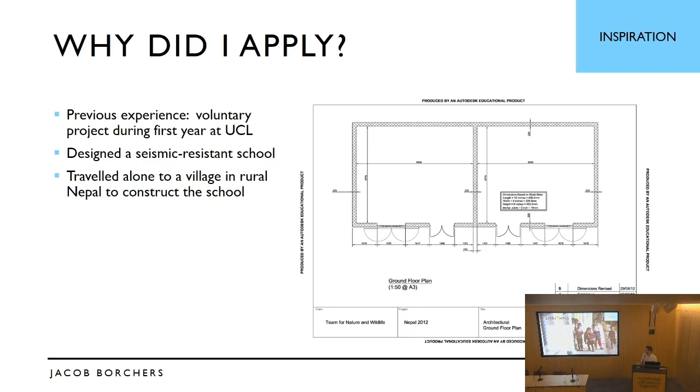So when I set off that summer, I was quite confident because we had all the money, we'd done all the structural calculations, we'd produced the drawings, and I had 1 year of engineering knowledge behind me. So what could go wrong? I thought, everything. So it turns out everything went wrong.

The project was an abject disaster from start to finish while I was there, and also while my colleague was there. We had landslides that stopped us getting any materials to site. The building materials we'd designed the school with couldn't actually get sourced anywhere in the district when we got there.

The only translators we had were some university students, and they got bored after about 3 days of the 4 weeks that I was there, so went back to Kathmandu, so the rest of the time no one spoke any English.

The labourers we employed couldn't read our construction drawings. They'd never seen drawings in their life before, and they also couldn't lay concrete blocks, and as we were trying to get them to build a concrete block school using our drawings, it was not a smooth process.

The labourers went on strike several times. There were huge divisions in the community that sometimes resulted in physical fights happening on site, and these physical fights would be a result of conflicting local politics and huge divisions due to the caste system in the community.

We also had big problems with corruption. A lot of the senior people there expected a big part of the project budget to allow us to work there.

But despite all these community divisions and everything they disagreed on in the physical fights, the one thing they did all agree on was that Nepal does not have earthquakes, and they strongly resisted all the earthquake-resistant features of our design. They saw it as an unnecessary expense and complexity, and kept saying to me, if you give us the money, we can build 4 of our own schools in half the time. And they proved that point to me.

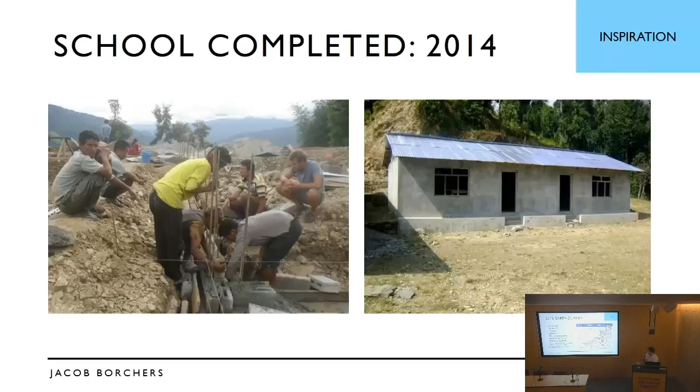But then in 2015, you probably remember it was in the news, Nepal was hit by 2 massive earthquakes. The epicentre of the second one, which was 7.3 on the Richter scale, was about 10 miles from Sunkhani, the village we were working in where we'd built the school. The whole village was completely destroyed. I went back in January this year for the award, and not a single building was left standing. It's apocalyptic - everything is just a pile of rubble.

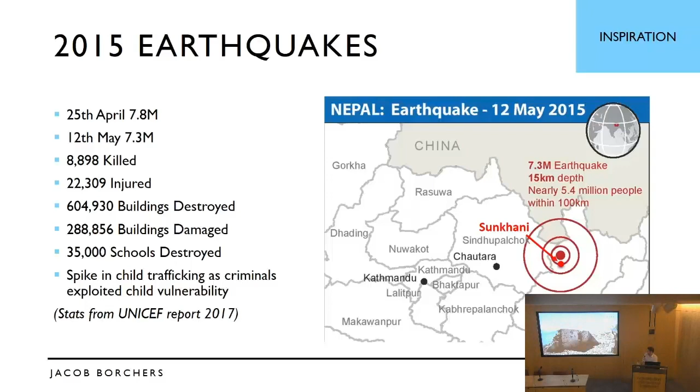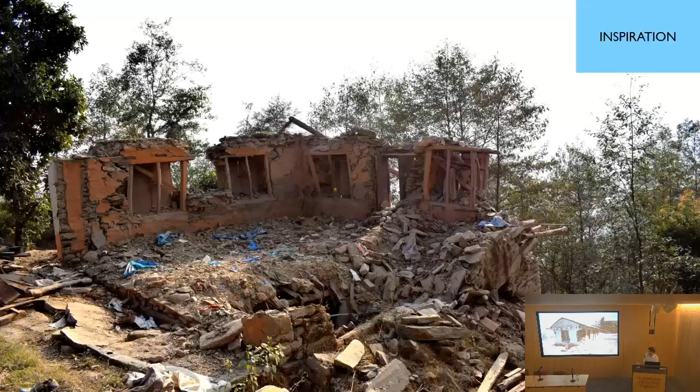And this is how most of the community is now living - these tin shacks they made from the metal roofs of their previous homes. The idea was that this would just be a temporary solution until aid money came in and they could rebuild. Really hot in summer, really cold in winter.

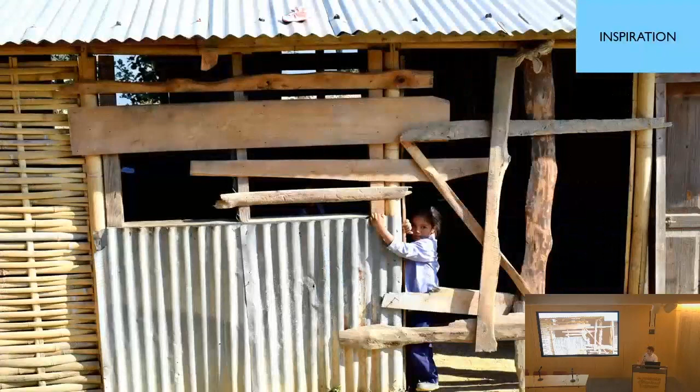And this is what they call temporary learning centres - temporary schools built from the remains of the old schools, mainly the tin roofing. The idea was this would just be a temporary solution that saw them through until more money came in and they could rebuild the schools. But 2 years on, it's not too temporary anymore.

So despite vowing never to return to Nepal, the fact that our school survived and no other schools did made me reflect on the importance of earthquake-resistant engineering, and despite the difficulties in implementing it, it is worth it. I also strongly suspected that engineers and NGOs out there do a much better job of implementing it than we did.

So I applied to the Pai Lin Li Travel Award to go back this January and talk to practicing engineers and NGOs out there, to find out what they do to overcome the problems that we faced. So what are the problems in implementing earthquake-resistant engineering?

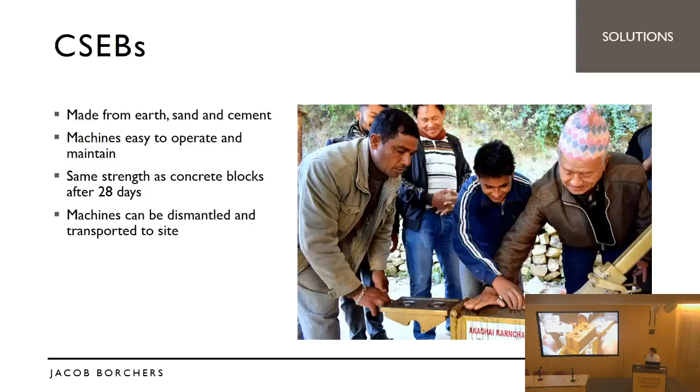After 28 days of curing you get these CSEBs - no, sorry, this comes out of the machine straight away, and you leave that for 28 days and then it has the same strength as concrete, or so they claim. I'm sure it's got the same strength as the Nepalese concrete, because that's not good. But they come in all shapes and sizes - sometimes they interlock like these ones for added strength, and this one's got holes in so you can run rebar through it. The main point is you're minimising the amount of material you have to transport to site, because you're using most of the material from the site itself.

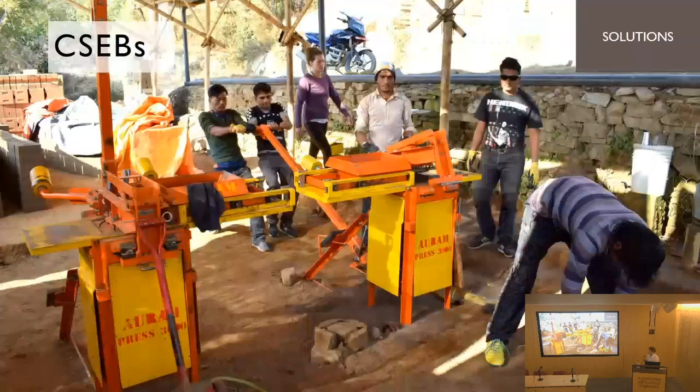They're also good because they're unskilled to produce. So this NGO, whenever they go to a site to build a school, employs the locals in producing the blocks for the school, which provides employment for the time that they're there.

In more rural areas where you can't get cement or steel because they're too far away from any road, some NGOs are developing wooden ladders, which you use in the same way as RC ring bands. So you put them at lintel level, sill level, roof level, and foundation level, and they're supposed to tie the building together in the event of an earthquake.

Engineers in urban areas are very cynical about this. They say it's not proven and they don't believe it works. But if you raise that with the people on the ground training the locals, they just say, well, what do you want us to do? We're doing the best we can with what we've got, and I'm sure it's better than nothing.

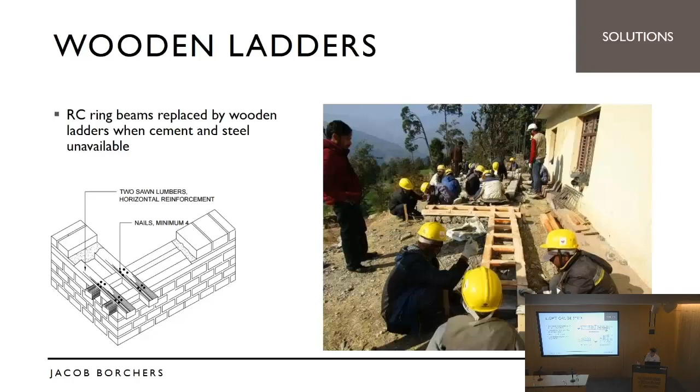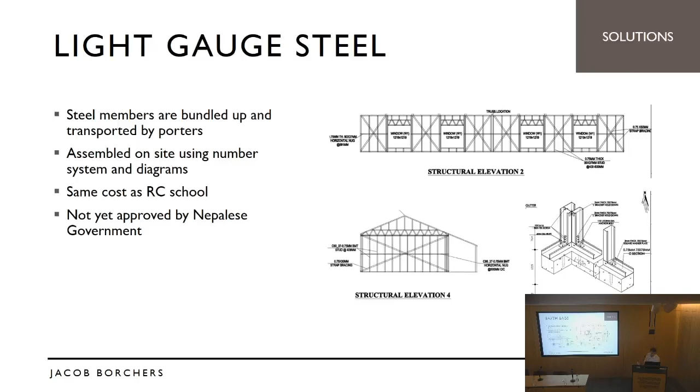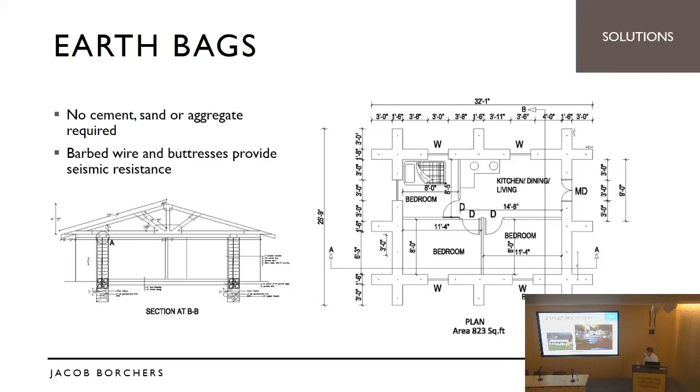The reason that's a disadvantage is that all these new ideas are great, but you're often working with quite traditional communities that have been doing things the same way for a very long time, so there's often big resistance to doing things differently.

The Earthbag NGO had stories of turning up to villages completely desolated by the earthquake, with nothing left, offering to rebuild their community - rebuild their schools, rebuild their homes. The community is initially really excited, really grateful, and then they get halfway through the construction process and see what it looks like, and it doesn't look pretty.

The only way to get around this, and the solution employed by the Earthbag NGO and the CSEB NGOs, is to just build good examples - as many good examples as you can - and as the community becomes more familiar with it as an idea, they become more susceptible to it.

The Earthbag NGO had a tactic of targeting the most prestigious member of the group - a religious leader or community leader - building them an Earthbag school, sometimes even paying them to build it. The idea is that once they accept it, the rest of the community is likely to be more susceptible to the idea.

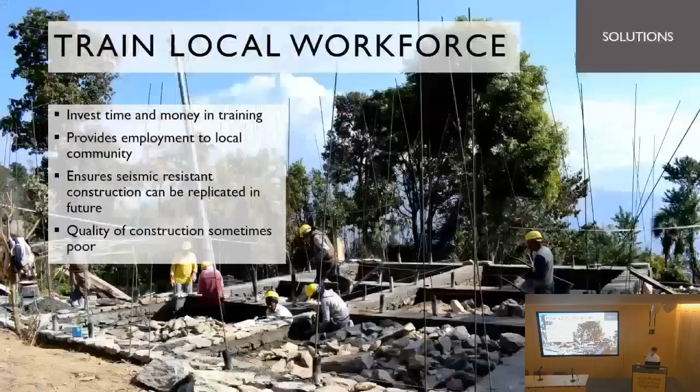The most conventional approach is to train the local workforce - investing a lot of time and money training people on the job. This has the obvious advantage of providing employment and giving them skills they can use to build their own earthquake-resistant buildings. But the big disadvantage is the quality of the final build is often quite poor because you're training people on the job.

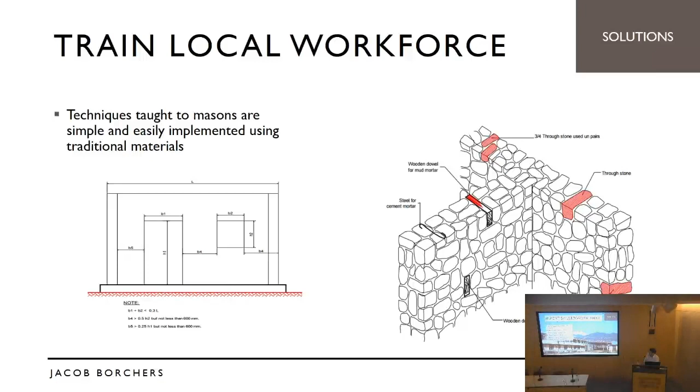A more controversial approach taken by some NGOs is they say you can't trust the quality of any construction built by local labour, so they import their own workforce to every site, who they keep on site until the school is finished, then move them to the next site. It's really good in the sense you get a high quality build from labourers you can trust, but it causes massive resentment in the community because they're not getting any training or employment.

And these NGOs, none of them use drawings, so when we turned up with our 2D construction drawings, it was an error. They all use 3D images, sometimes computer generated, sometimes sketches, to get ideas across to labourers on site. One NGO, for a reinforced concrete block school they've built, painted in red where the RC ring bands are, and in black the lines going up where the vertical steel is in the walls, using it as a real-life training aid. Whenever they're doing a new project, they take the workforce they're training to a previous school and show them all the features in real time, and apparently it works really well in getting the ideas across.

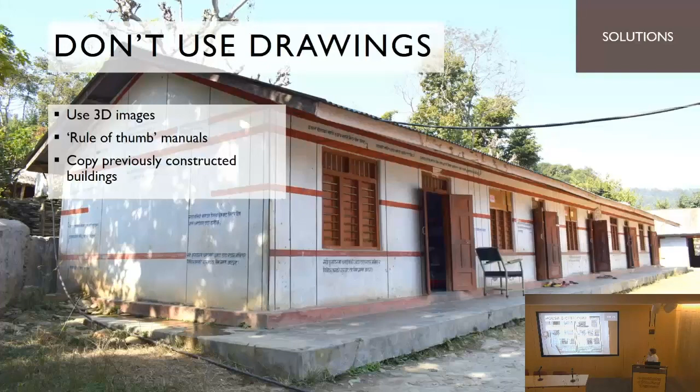In the wake of the 2015 earthquakes, the government produced a lot of material showing people in rural areas how to rebuild back in a seismic resistant way. All this material is isometric images and easy diagrams, none of it 2D construction drawings like we're used to.

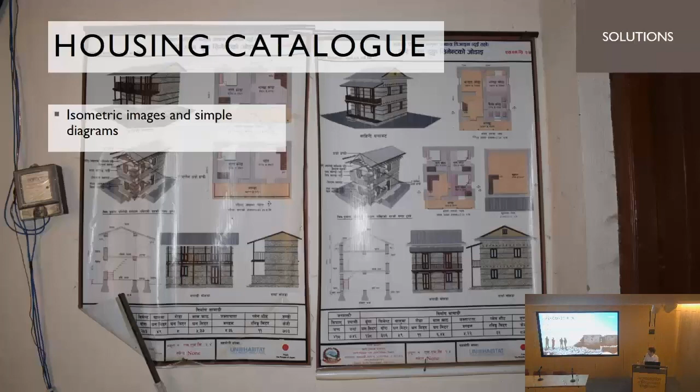One of the biggest problems we had was there was no perceived risk of earthquakes when we were there in 2012, so all the time and money we were spending trying to make the school earthquake resistant was seen as a waste of time and money. This is surprising because Nepal is struck relatively regularly by earthquakes, and there have been some quite bad ones within living memory, but the last one anywhere near as bad as the 2015 earthquake was in 1934, so it's just outside living memory.

This is what people said when I went back in 2017. They said they knew Nepal had earthquakes, but they just never understood how bad it could be. It's understandable because the last one was just outside living memory and there was no awareness training in these rural areas whatsoever.

Since the 2015 earthquake, they've been running awareness training programs in these rural areas, but the sad fact is they don't need the awareness training anymore. This entire generation has been scarred by the effects of the earthquake and they know how bad it is. There's almost a frustration when they have to attend these trainings funded now by the government, because they say, yes, we know the risk, but what do you want us to do about it? We don't have the money to rebuild, and we don't have the skills to rebuild, so there's no point telling us there's a risk of an earthquake. We know that. Just give us the resources to deal with it.

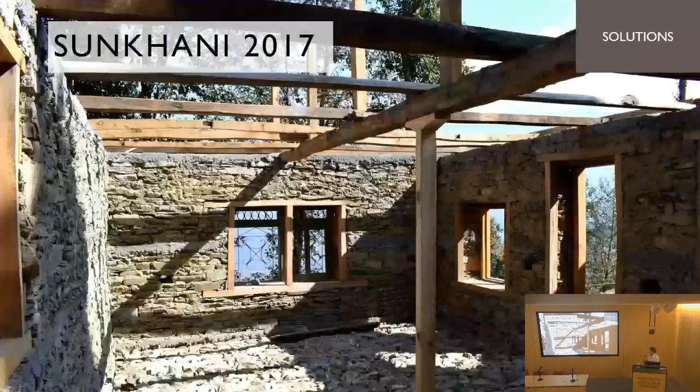This was taken this January when I went back. This is one of the wealthier communities in Sunkhani, the village where we built the school in 2012, or tried to. This is one of the wealthy community members who's been able to build his house back, since he's had the money to do it. With no training whatsoever, just copying what we did in our school and other buildings he's seen, he's tried to implement some earthquake-resistant features.

You can see he's got some RC ring bands, a little one at the top there. I don't think there's any rebar in there, but he's also got one midway over the building, and he told me he had one in the foundations as well. So although it's not ideal, you can see the philosophy has changed in the sense that people are very keen to rebuild back in an earthquake-resistant way now.

We had big problems with the local politicians, and I thought we were particularly unlucky, just had a particularly difficult group of local politicians. But when I went back, all the NGOs and all the engineers I talked to all said the number one problem in all their projects is local politics.

The way Nepal works is the rural area is divided up into village development committees, or VDCs. Each VDC is headed by an elected board, who in turn is headed by an elected chief. These local politicians don't get any money from central government, so the only money they can make is through the influence they wield. It's almost accepted, not only amongst them but also amongst the local community, that any work coming into the area should pay them some cut of the budget, just because how else are they going to get their money, as they put it.

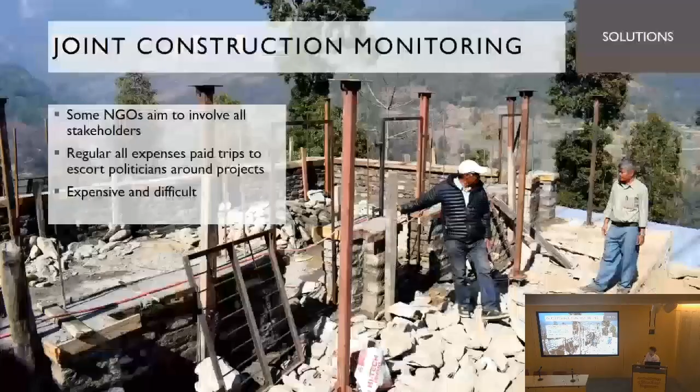All the NGOs have very different approaches to dealing with this problem. The most conventional approach a lot of NGOs take is what they call joint construction monitoring. They aim to involve all the stakeholders as much as possible from the start of the project. So they take the local politicians, the teachers, the religious leaders, on these long, all-expenses-paid trips where they tour them around the district, show them all the schools they're building, answer their questions, make them feel involved. The idea is the more involved they feel, the less problems they cause. It's generally meant to be quite effective, but it's quite expensive and difficult, as you can imagine.

The opposing, more controversial approach is to just refuse to engage with it at all. So some NGOs, the same ones that do the trick of moving their own labourers from village to village, also refuse to work in a village if the local politicians kick up any kind of fuss or ask for money. There are so many villages in Nepal that need schools built that it's no problem for them to turn up, and if there's some sort of issue they'll just move on to the next village, and keep moving around until they find a political climate in which they can build a school with no problems.

Great, but then the people that lose out are the kids, because they don't get their school just because the local politicians are demanding money.

Related to the previous point, corruption - we had senior officials in the area who were demanding 30% of the project budget, and they wanted it in cash before they would let us work there. We didn't pay them the money, and that's when most of the problems in the project started.

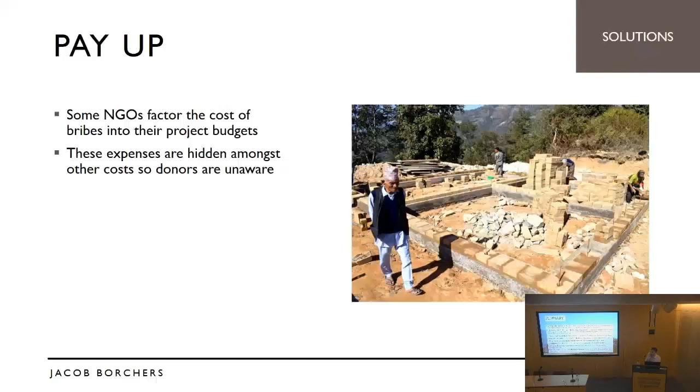So the summary of my project was just a list of recommendations that I would make to anyone going to Nepal to build an earthquake-resistant school. I gleaned them from talking to people out there who do an incredibly good job of this, a much better job than we did.

I'm not going to go through them, but what I mainly got from the project is that I've always known in structural engineering, a small part is the structural engineering itself and a big part is actually getting it built. But in projects like this, what I failed to appreciate when I went out there is the structural engineering is about 1% of it, and the other 99% is getting it built. You just have to wade through this quagmire of complexities and difficulties that you could never anticipate sitting in your engineering office back in the UK.

But I will say it is worth it. The fact that our school survived and no other ones did made me think it's worth wading through the complexities, just push through and do it. So, yeah, I'll take questions now, if you've got any.

Let me just say, before we go into questions, 15 years ago I was president of this institution, and I raised the issue of corruption in my president's address. Some of my fellow directors were sitting in the seats in front of me, moving around, and their wives were saying to them, 'What the hell's Bob talking about?' Nobody talked about it in 2002.

It was happening. It was happening. And at the Guildhall address, I eyeballed a number of consultants and said, 'You know it's happening, stop it.' I got picked up on it, and I ended up giving evidence to Parliament in a special committee where they were trying to write an anti-corruption bill. Only our drafters could call it the corruption bill rather than anti-corruption. And I got grilled in Parliament, and a lot of the lawyers were condescending to me: 'Well done, old chap, but you can't stop this.'